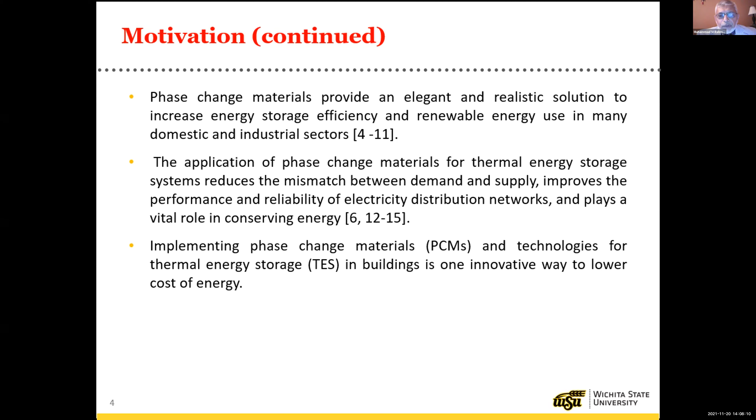Implementing phase change materials and storage in general, we can see there are two routes: one is the thermal route and one is the chemical route. We have worked on both of these routes, and I have a review paper on the chemical route as well, but today we're going to talk primarily about thermal things.

So in the thermal route, we store energy by sensible heating as well as by latent heating. Looking at latent heating first, we can conceptually have solid-liquid phase change, liquid-gas phase change, and solid-solid phase change. But in building applications, of course, the solid-liquid is the only feasible one.

So this is the only one which really is possible in building applications. And even for power applications, the gas phase picks up a lot of volume and becomes a difficult system to design and so on.

In sensible heating, as the temperature increases, it will store energy, and it will happen both in the solid phase and the liquid phase. So practically, we see that you can build a good phase change energy storage system by using the solid-liquid conversion, and then having some storage in the sensible mode, both in the liquid as well as in the solid portion.

So if we look at the equation for how much energy we're going to store, we can do a very simple equation like this: we store energy from initial temperature to melting temperature, then we store isothermally, or approximately isothermally, when the material changes phase from solid to liquid, and then we store more as we go from the melting temperature to the final temperature. This is for the charging phase of the system, and the discharging is just the reverse.

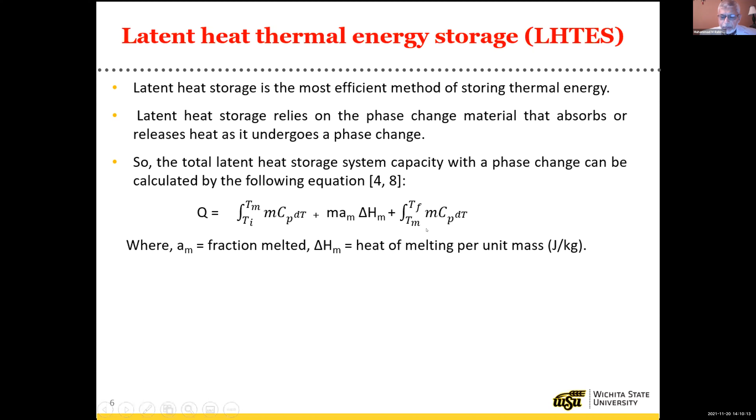Looking at the desirable properties of the phase change material, there are thermal properties which are important: the melting temperature in the functioning range, where we want to maintain the temperature, and of course we like to have a high latent heat. The specific heat also adds up, because we'll have some sensible heating in both phases, so a higher specific heat is better for us.

High thermal conductivity is extremely important because that is going to determine the rate of heat transfer during the charging and discharging of energy from our energy storage module.

Some physical properties are also important: a small volume change on phase transformation, favorable phase equilibrium, congruent melting of the phase change material, and the density should be high so that we can build a system with a reasonable amount of mass.

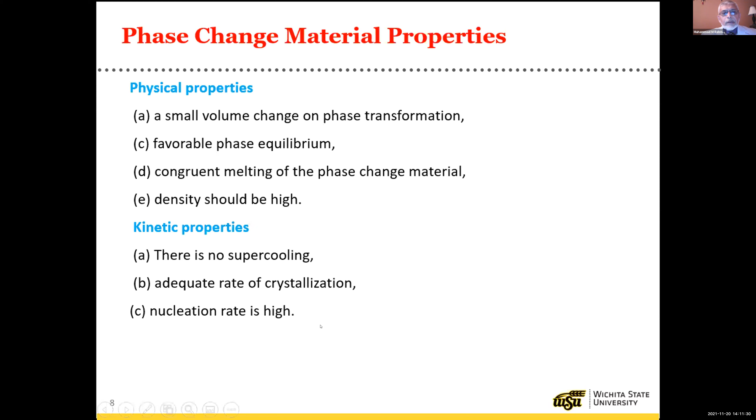There are also a few kinetic properties: there should be no supercooling, an adequate rate of crystallization, and a high nucleation rate. So those are the desirable kinetic properties.

A whole bunch of chemical properties is needed. The PCM should have an entirely reversible freezing-melting cycle, long-term chemical stability, compatibility with the containment material, and be non-toxic, non-flammable, and non-explosive to provide safety of the system. The phase change material should also be readily available in large quantities and at low cost.

All these different ideal things do not hold in real life, so we're always striving to make the system work by doing fine tuning.

One of the fine-tuning approaches we use is incorporating nanomaterials along with the phase change material to change the properties. We have done work with both solid-liquid melting as well as in high temperature systems, where we use the nanomaterials to enhance radiation. But that, of course, increases the cost of the system.

If we look at phase change materials, a good number of materials used, particularly for low temperature applications, are in the organic group. A lot of paraffin compounds have been used, and some non-paraffin compounds as well. That's the organic group, and then in the inorganic group we have salt hydrates as well as metallics. Both are very popular, and we can make eutectics by combining organic with organic, or organic with inorganic.

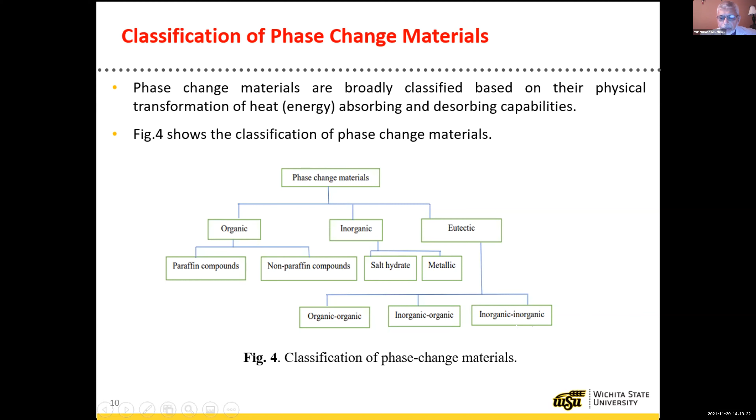If we look at the advantages and challenges we face in each of these groups, in the organic group we see that they're available in an extensive temperature range. Latent heat of fusion is fairly high, no supercooling, usually chemical and thermally stable, and they are also recyclable, which is very important in life cycle design. Good compatibility with other materials, usually non-reactive and safe. But it has some challenges, particularly low thermal conductivity, relatively large volume change, low phase change enthalpy, and some of them happen to be flammable.

By making eutectics, we can get a wide range of phase change temperatures. That's the most usual application of eutectics. They do provide high heat capacity, little supercooling, good chemical and thermal stability, but the low thermal conductivity is the problem.

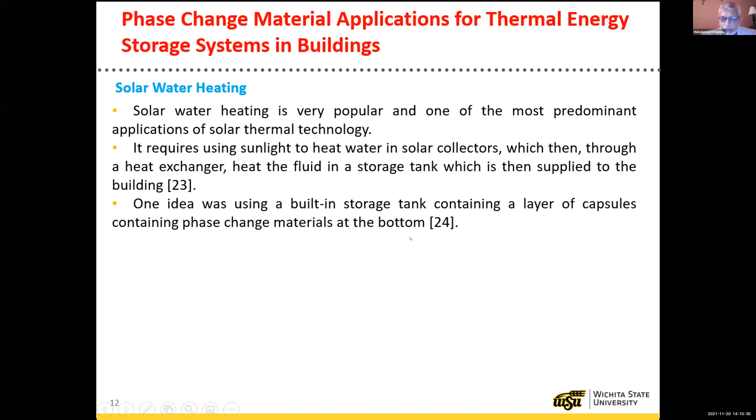Now let's talk about some of the traditional applications of phase change material in the building sector. One of the things people have used for a fairly long time is solar water heating. Solar water heating is a very simple system we can build, essentially by acquiring the energy from the sun and storing it. Typical designs use a built-in storage tank containing a layer of capsules with phase change material at the bottom of the tank or on the side of the tank, storing the energy gathered from the sun.

Another sector is space heating and cooling. Phase change material can be applied to both active and passive heating and cooling systems. In the passive system, we typically encapsulate the material into the building structure such as ceiling, floor, concrete, gypsum wallboard. In the active system, we capture the energy from the sun and then try to use some of the energy for the generation of electricity if we can gather enough from the sun.

Waste heat recovery is another application. It's a very simple application, but typically these are not residential applications with great amounts of heat. It's in the industrial sector where we possibly have a lot of heat. But that's another application we can think of.

Let's talk about the limitations of phase change material. One of the limitations we come across is supercooling. Supercooling happens when the liquid solidifies below its usual freezing point and thus experiences a delay in starting the solidification process. So we store the energy, but we have difficulty in extracting the energy back from the system.

The group which suffers more from this issue is salt hydrates, which supercool before the freezing point during extraction of the stored energy after prolonged use. This causes a decrease in performance and will eventually lead to slower heat recovery from the phase change material. It's more common in inorganic phase change materials to suffer from this limitation. Also, when we do encapsulation, we have a lack of nucleation space in small spaces, so that's another issue we need to solve.

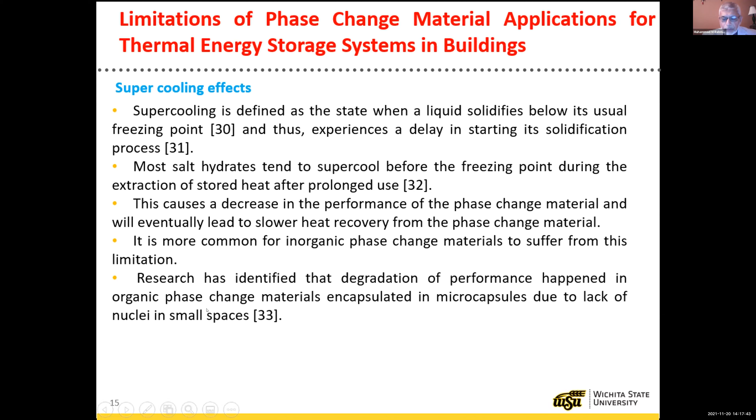The low thermal conductivity is a major problem, but there's been a lot of work done to address it. Phase change material generally possesses very low thermal conductivity, which results in a lower heat transfer rate in and out of the latent thermal energy storage application. In the residential sector, low thermal conductivity could severely affect the performance of the phase change material system. With lower thermal conductivity, the occupant comfort level provided by the phase change material is not realized at full capacity.

Phase segregation is another issue in using phase change material. It's one of the most significant adverse influences on the cyclic thermal stability of the material. It's most usual in multi-component phase change materials where the density of components is dissimilar, leading to eventual separation of the components due to gravity, which changes the melting point of the phase change material. Incongruent melting, when a solid substance does not melt uniformly, particularly in salt hydrate-based phase change materials, is another main cause of phase segregation. Phase segregation restricts the long-term stability of the PCM, so we like to avoid that as best as we can.

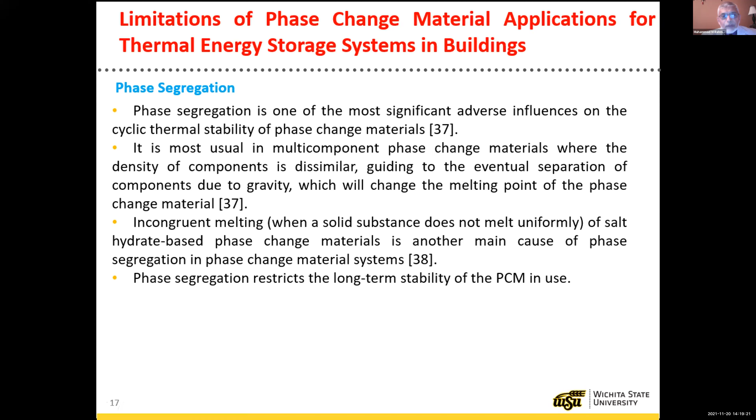In residential application, fire safety is extremely important. Some very common building materials like gypsum plasterboard have been used quite heavily in the residential sector and tend to be quite safe. But when we use 24% paraffin-based phase change material, the fire hazard increases tremendously. So we have to be careful in applying the phase change material and make sure that the fire hazard does not happen.

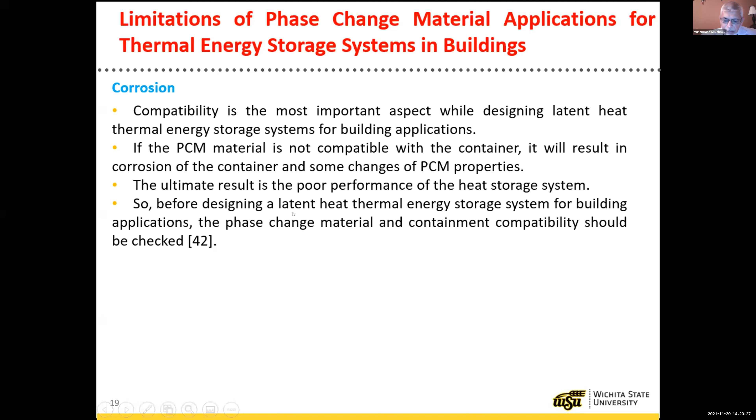Corrosion is another thing you have to be careful of in essentially any engineering design. Compatibility is the most important factor. If the PCM material is not compatible with the container, it will result in corrosion of the container and some changes in the PCM properties. The ultimate result is poor performance of the heat storage system, including leaking. So we need to be mindful of that.

And cost is again the ultimate thing we have to look at. Particularly if we change the phase change properties and use nanomaterials, we have to be careful about that, so the cost does not increase tremendously.

Another interesting thing we found is that the general public is not that much aware of phase change material, and we, as engineers, need to talk to the public and highlight the benefits of phase change material to make it more acceptable to technical as well as non-technical audiences.

We looked into a case study to see how much energy saving we can do. This was a fairly straightforward exercise, I would say.

We compared the energy use without the PCM as well as using two PCMs, to see how much energy we can save. The software we used was the Energy Plus software, which is available from the Department of Energy for public applications.

It's a very simple software, but it has been quite well validated and verified by different authors, particularly with the ASHRAE Standard 140, which was the important validation exercise that's been done.

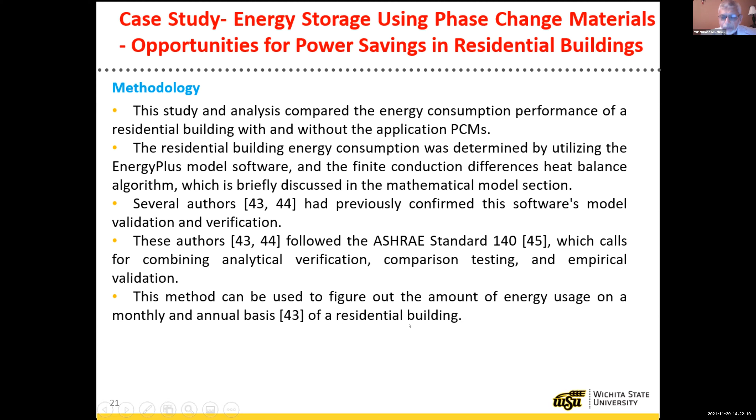So in the cooling load, we did it without the PCM and then looked at what happened with the PCM, and compared that for the whole year. Maybe we can just look at this table: without PCM, that much is the kilowatt hour requirement for the building which we used.

With the PCM, we got it lower by 2.13%. With the DuPont, we lowered it by 4.34%. The cooling load was 105,049 kilowatt hours - we got 3.74% saving with the PCM, 2.02% saving with the DuPont. And overall for the whole year, we get right around 3% saving using the PCM.

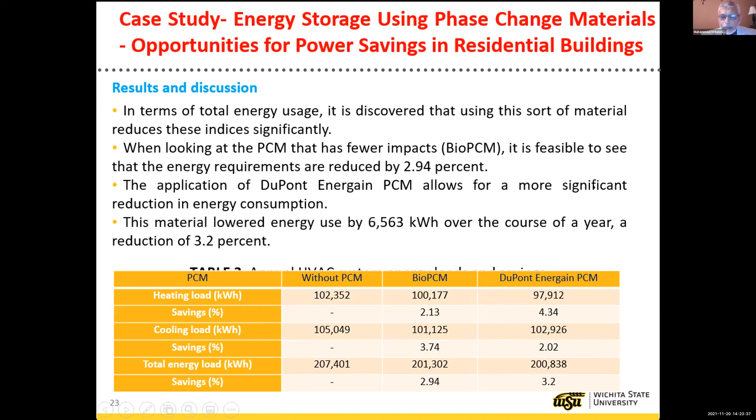So if we do use PCM, we do get some savings, as long as we can justify the cost of using the PCM.

So the use of PCM to reduce the consumption of residential buildings has been discussed. Two distinct PCMs with melting points of 21.6 degrees and 29 degrees were investigated in the study. The study was conducted using dynamic simulation software of a DOE mid-rise apartment building, examining energy performance as well as weather data, with and without the use of PCM material.

It can be deduced from the numerical analysis that the application of PCM in external walls and roofs stores heat energy from solar radiation, hence reducing the energy consumption for heating and cooling. The study resulted in a maximum decrease of 4.34% in heating energy requirements, a reduction of 3.7% for cooling requirements, and a maximum reduction of 3.2% overall throughout the year.

So I'm leaving 5 minutes for questions so that we can have a good discussion by getting input from the audience.

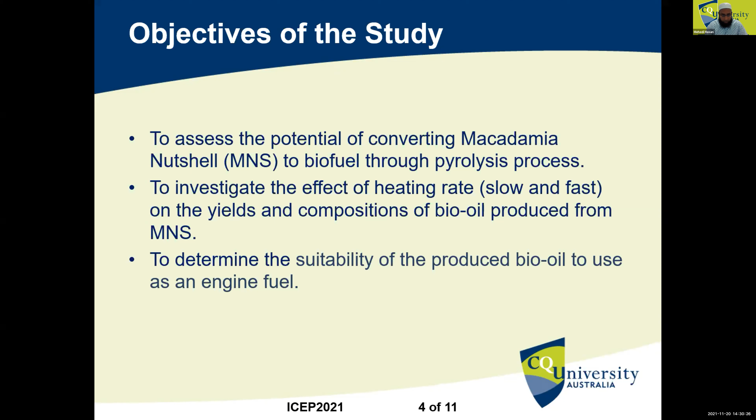Therefore, this study aims to assess the potential of converting macadamia nutshell to energy products, especially bio-oil, using the pyrolysis process, and to evaluate the effect of heating rate, slower and faster, on the quality and quantity of the produced bio-oil from macadamia nutshell, and finally to determine the suitability of the produced bio-oil for engine fuel using the pyrolysis process.

Here you can see the macadamia nuts covered with shells. After processing these macadamia nuts in the industry, these shells are generated. So we collected the shell, and then it was sun dried for 12 days. After that, the desired size was prepared with the help of a shredder, which is 2 millimeter size. Then these shredded shells are fed into the reactor, an auger reactor.

This reactor has the facility of conducting both slow and fast pyrolysis. In case of fast pyrolysis, the macadamia nutshell is fed into this hopper, and then nitrogen gas is purged to make the system inert. After that, from the control panel, the temperature heating is started and the temperature is set. When the temperature reaches the desired temperature, which is 500 degrees Celsius for this study, the auger motor is started, which carries the macadamia nutshell through the auger.

During this travel, the pyrolysis process takes place. After completing the travel, the macadamia nutshell is converted into biochar and is dropped into the biochar vessel. It also produces gas during the pyrolysis process, which has condensable and non-condensable components. This gas is passed through a condenser, which condenses the condensable gases into bio-oil, and the non-condensable gases, called syngas, leave the system through this exit valve.

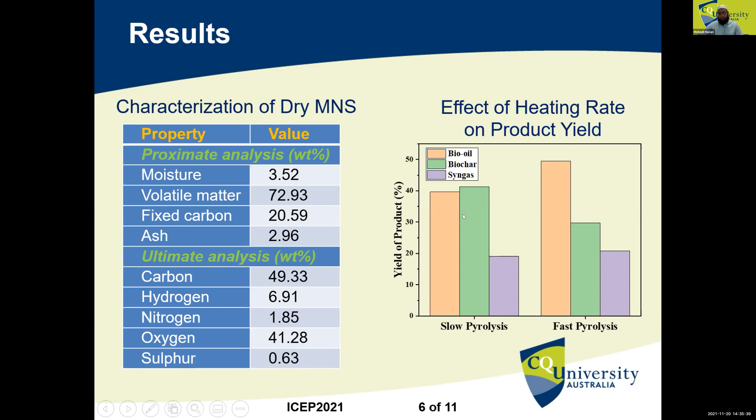However, the bio oil has some acidic compound, which is not good for use as engine fuel, because acidity will create aging problems in the bio oil. So it will limit its application as an engine fuel. The suitability of the bio oil to use as engine fuel or commercial fuel can be clearly understood from its physiochemical properties.

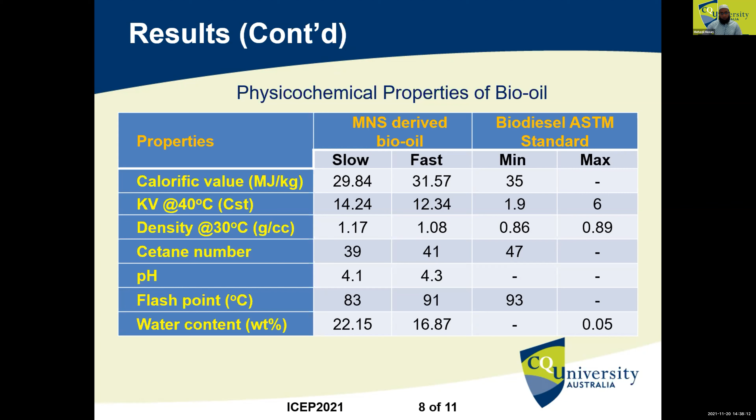We can see that the calorific value, when compared with the biodiesel ASTM standard, is clearly not close to the biodiesel standard range. So this is not suitable for engine application, and kinematic viscosity and water content are very high. From these results, we can say that if we want to use it as engine fuel, it needs proper upgradation using various upgradation processes.

From this, we can conclude that the macadamia nut shell bio oil has a lower moisture content and a higher carbon percentage, making it a suitable feedstock for the pyrolysis process. A higher amount of bio oil was obtained, around 49.7% in fast pyrolysis. The bio oil contains major chemical compounds like benzene, toluene, phenol, styrene, and acetic acid. However, due to higher viscosity and water content, bio oil's application as engine fuel is not possible at this stage. Proper upgradation is required.

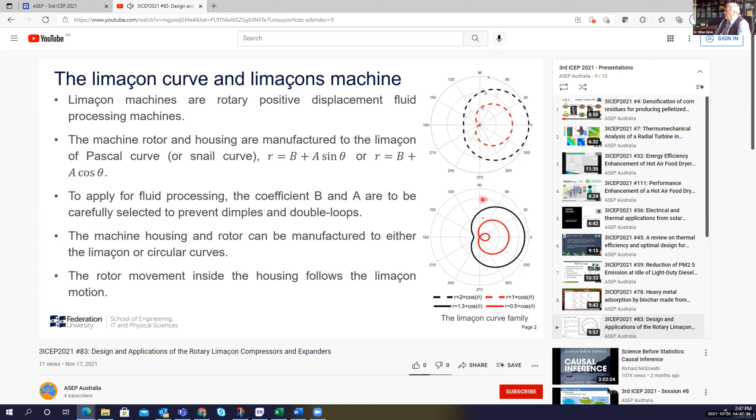If we move to the second figure, the red curve here, you can see we have a double loop. For limaçon machine applications, we want to use the black dotted curve on the first figure. This curve will provide dimple free and single loop motion. The reason behind using a single loop, dimple free curve is that it ensures a smooth motion and transition of the machine rotor inside the housing.

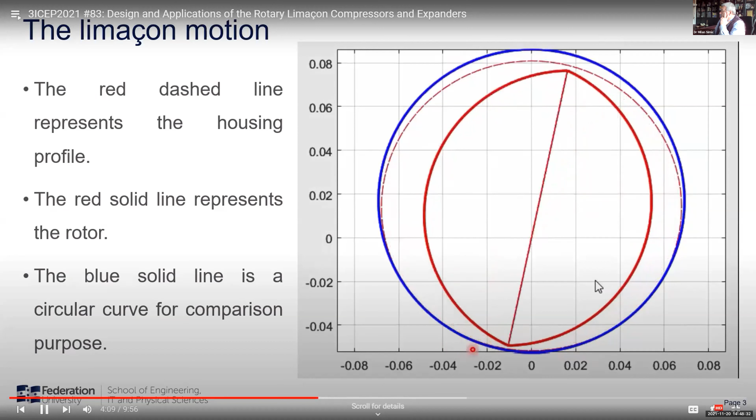On the next slide, we'll see the animation of the motion of the rotor inside the housing. Here, as you can see, the red dashed line represents the housing profile. The red solid line rotating there represents the rotor, and the blue line on the outside is a circular curve, which I plotted here for comparison purposes.

So this is a limaçon motion. As you can see, the straight line, we call the rotor chord, and that rotor chord rotates and slides about the pole O. This point is the pole O.

Currently we have three limaçon machine embodiments. There are three of them: the limaçon to limaçon machine, the circle limaçon machine, and the limaçon to circular machine. The distinct differences between these designs are the rotor and housing profiles. Going from left to right, the left one is the limaçon to limaçon machine, where the housing is a limaçon curve, and half of the rotor is a limaçon curve, mirrored about the rotor chord, creating a lenticular shape for the rotor.

Moving along, the next one is the circolimaçon machine. With this machine, the housing and the rotor are both made of circular curves. However, the motion of the rotor inside the housing follows the limaçon curves. The downside of this is the gap between the rotor apex and the housing changes as the rotor rotates inside the housing. This creates trouble for sealing, because the seal has to travel a large distance to cover that gap.

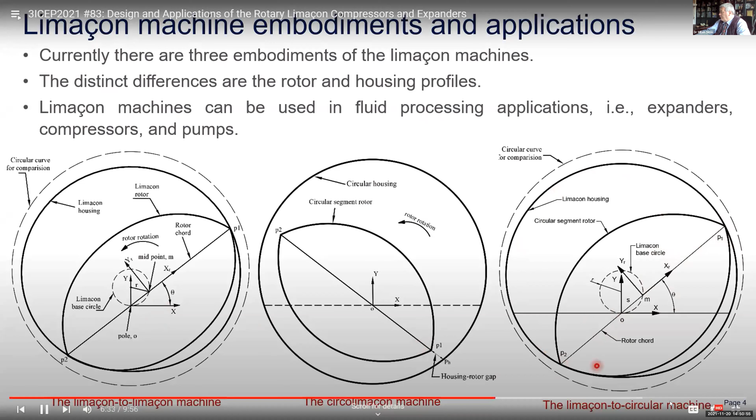To address that issue, there's a third embodiment we call the limaçon to circular machine. The housing of this machine is a limaçon curve, while the rotor is comprised of two circular sections that are mirror images of each other about the rotor chord. This embodiment has the advantages of both designs, using the limaçon curve, but also the advantage of manufacturing the rotor easily, since you just need to follow a circular curve here.

With the limaçon to circular machine and the limaçon to limaçon machine, you don't have the problem where the gap between the rotor and the housing keeps changing. So it's constant throughout the rotation.

On this slide, we'll talk about the work on limaçon machines. Work on different machine embodiments has been carried out over the years to investigate the use of both limaçon and circular curves for the rotor and housing profile, while maintaining the limaçon motion of the rotor inside the housing.

Other work shows the rotor and housing share the same rotor chord. In fact, in the case of the limaçon to limaçon machine, the lower half of the rotor profile is the same as the housing. Therefore, to prevent rotor-housing interference while minimizing the rotor-housing gap, an interference prevention scheme has been developed, as shown in the work by Sultan.

With the design and interference scheme in place, it's now important to optimize the geometry of the machine to suit the working conditions set out by particular applications, like machine inlet and outlet pressure, the type of working fluid, the machine working speed, and so on. On top of that, high volumetric and isentropic efficiency are to be maintained. For optimization methods, we can use SPSA, simultaneous perturbation stochastic approximation, or Bayesian optimization.

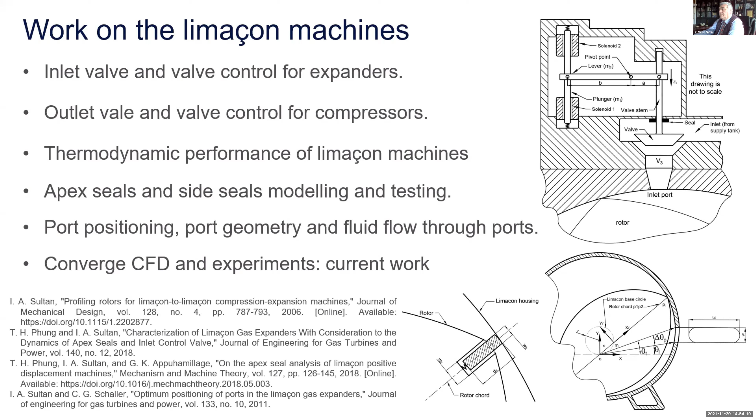That concludes this presentation, and thank you for your attention. If you have any questions, please feel free to ask, and I'm happy to answer.

Okay, hi everyone. Because the presenter is not here, I suggest— Oh, I'm here, it's me, just a second. Oh, sorry, you didn't want to— No, it's okay, that's okay. Then we have questions for you. Are there any questions?

Okay, I have one question. Your work is very interesting. I didn't do research in this field, so please share how you set up the experiment for your study of thermodynamic performance.

So, is that all of the question? How to set up the experiment? How to set up, yeah, I get it. Is that all? Yeah, for the test.

So what we've been doing: we developed the mathematical model, optimized the design, and ran the CFD simulation. The next stage will be to use the outcome of the mathematical design and CFD simulation, which gives us the dimensions. We'll create a prototype and put it in a system to test. We have inlet and outlet, and sensors to measure the temperature, the pressure, the torque, and the speed of the crank, and we'll compare these to the mathematical model and CFD simulation to make sure the design is sound and achieves higher performance. So that's the plan for the next phase.

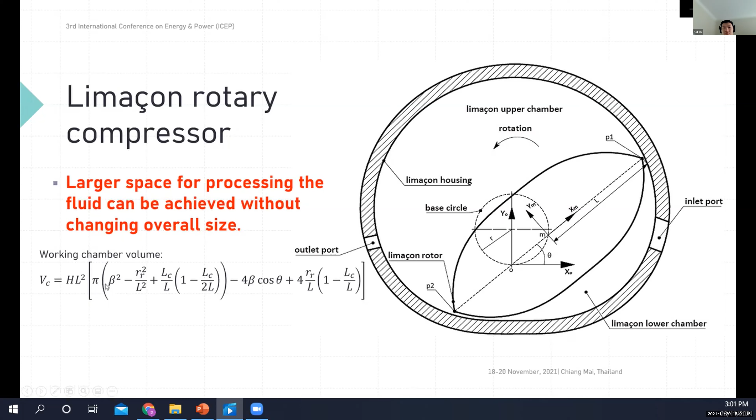The purpose of this study is to use Bayesian optimization to optimize the geometric parameters of the limaçon compressor to meet some specific volumetric and geometric design requirements, which are reflected by these three parameters.

The first one is the rotor housing clearance, which is the distance between a random point on the profile of the rotor to the machine housing, as indicated in this figure. The reason we have this clearance is because, as mentioned previously, the profile of the rotor and housing are based on the same limaçon curve, and it is unavoidable that interference issues between these two components occur during operation, which might significantly affect the machine performance. So to prevent that, the rotor housing clearance must be ensured to be big enough so that these two components will not interfere with each other during operation.

The next one is the volumetric ratio, which is defined as the ratio of the minimum chamber volume to the maximum chamber volume. Generally, with the clearance satisfied, the minimum volume, as indicated in this figure, should be kept as small as practical so that the volumetric performance and machine capacity would not be significantly affected. Hence, this ratio is to indicate whether the limaçon compressor can present a satisfactory volumetric performance or not.

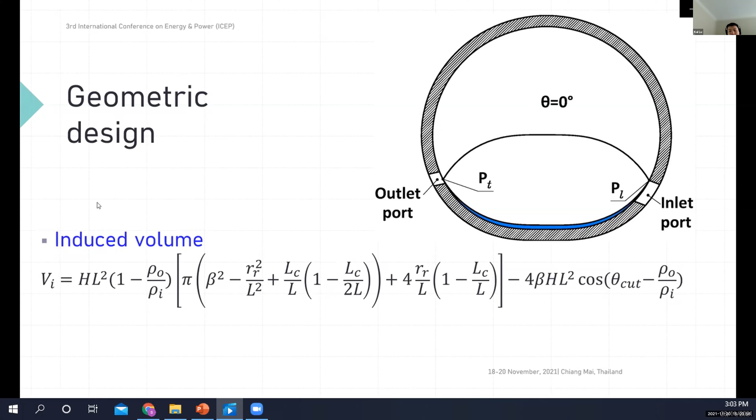The third one is the induced volume, which is the volume of the working fluid that flows into the chamber during the suction stroke. This induced volume measures the effect of the residual fluid on the fresh charge during the suction stroke. The purpose here is to make sure these three parameters, the rotor housing clearance, the volumetric ratio, and the induced volume, satisfy some predefined design requirements.

To do that, we apply Bayesian optimization. The reason is that generally the optimization of compressors is regarded as a black box problem in which the mathematical expression relating inputs and outputs is quite complex and sometimes impractical to obtain. So for this type of problem, the Bayesian optimization method has been proven to be very efficient and accurate.

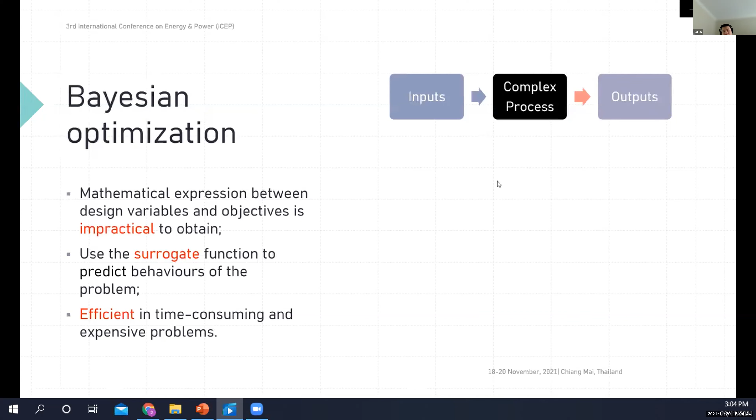It starts with sampling the starting data to build a prior distribution using the Gaussian process. From this prior distribution, the Bayesian optimization develops a surrogate model to describe the optimization problem. After that, some new data points are sampled from the searching domain, and the Bayesian optimization employs the acquisition function to evaluate whether the candidate point is suitable for the next evaluation.

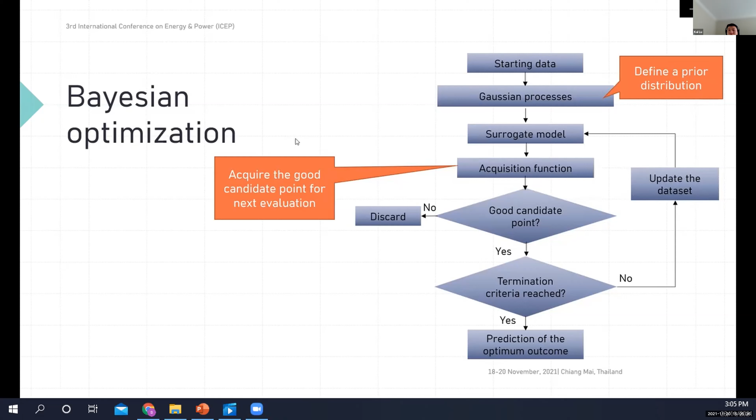This is the flowchart to illustrate this optimization procedure. As can be seen, we firstly generated 10 sets of data and obtained the corresponding objective functions using the geometric model presented previously. We then feed this data to the Gaussian process to build a surrogate model. After that, we sample some new data points from the searching domain and use the acquisition function to determine the next point.

For this optimization, it is relatively impractical to find the exact set of desired variables that produce the global optimum. Also, there might exist multiple settings of the desired variables that yield the same result due to the nonlinear relationship. So for the terminating condition, it is more feasible if the global optimum is reflected by a number of results obtained from the optimization. We decided that the terminating condition is when we obtain 90 sets of results from the optimization.

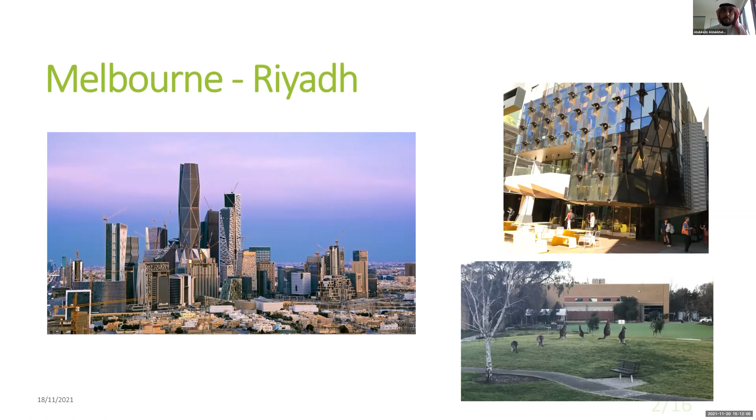Before I start, I would like to introduce the two beautiful cities: Melbourne in Australia, where I'm doing my PhD in mechanical and manufacturing engineering at RMIT University, as you can see on the right side, with some kangaroos on the campus. On the left hand is my hometown, Riyadh, the city in Saudi Arabia.

Moving to the outline, today we're going to introduce the project objectives and the role of artificial intelligence, also the role of artificial intelligence in traffic system modeling, a comprehensive system for traffic data collection, analysis and data management, the role of social media in intelligent transport systems, and finally the public opinion on autonomous vehicles.

Moving to the introduction, there are two main goals of this project: to report improved transport safety and efficiency, the development of new computer vision algorithms, artificial intelligence applications, Internet of Things, cloud computing, and investigating and raising public awareness of the transition in the transport sector.

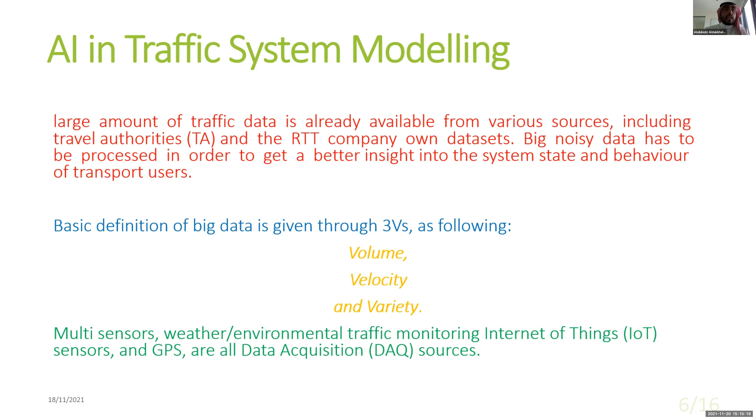Multi-sensors, weather, environment, traffic monitoring, Internet of Things sensors, and GPS are all data acquisition sources.

Comprehensive system for traffic data collection, analysis, and management: our main objective is to develop an ITS prototype to observe and control road traffic in real time based on computer vision and other sensory data fusion. This has not been done comprehensively, although current data acquisition systems, hardware, and communication resources can support that approach. Moving to the high-level concept of RTT.

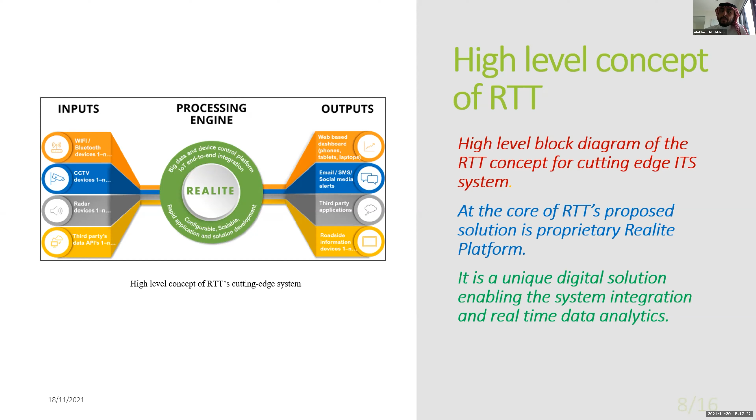When we talk about the public transport system, drivers and pedestrians, all of us, the general public, are key users and stakeholders in the transport system. We conduct research into public behaviors in transport and public opinion about changes and the roadmap to future mobility.

Social media's role in intelligent transport systems: nearly two-thirds of the Australian population own smartphones and use social media. Australia's smartphone ownership rate is higher than most other developed nations, so it's important to leverage cutting-edge technologies towards managing the transport system.

We present results from our public opinion survey on autonomous vehicles, in parallel with research in autonomous vehicle engineering and technology, including the development of new algorithms for path planning. We conduct investigation into public readiness to accept the new technology. This is a large project involving Australia, Saudi Arabia, and the global community.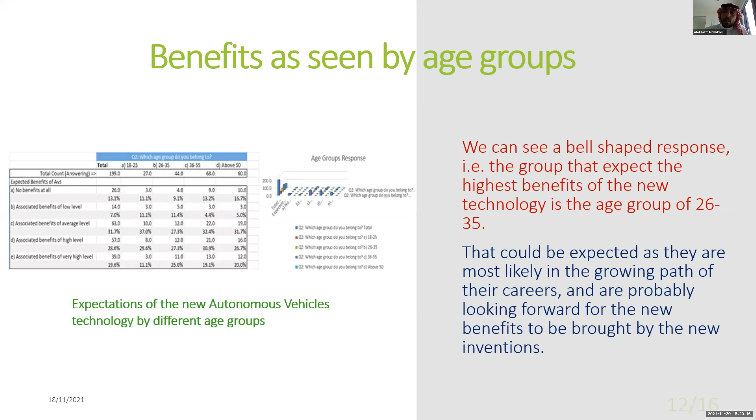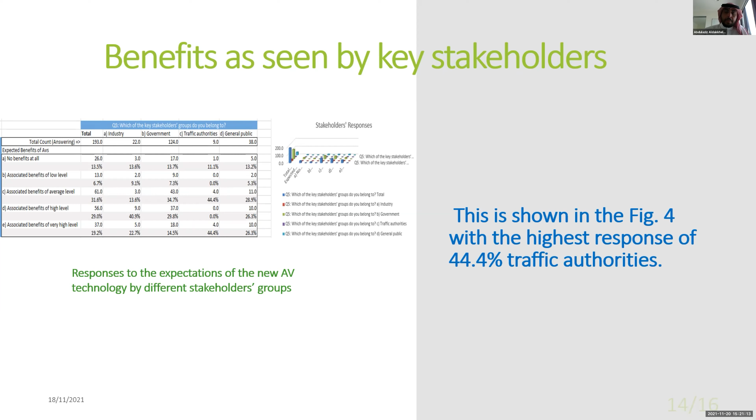Here are the benefits by key stakeholders: industries, government, traffic authorities, and the general public. As shown in the table, the highest response was from traffic authorities at 44.4%, indicating the need for autonomous vehicles to exist.

To sum up, we have presented here our research into intelligent transport systems, ITS development, and new technology introduction to the public.

Moving to the mobility of the future, this includes state-of-the-art ICT technologies starting with artificial intelligence, big data collected through the Internet of Things, computer vision, social media, and other sources. Cloud and edge computing are responsible for data processing in real time.

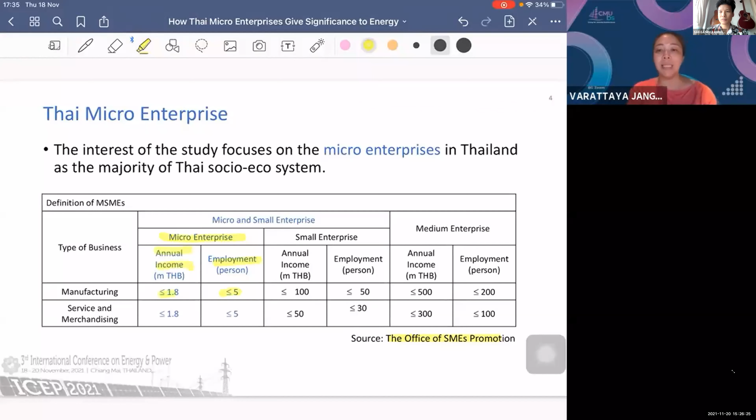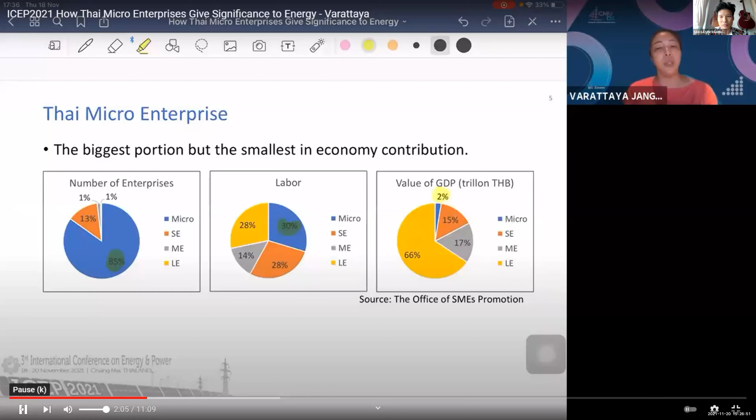So why is micro enterprise very important? Now we will focus on the definition of micro enterprise. The source is from the Office of SME Promotion: micro enterprise includes manufacturing, service, and merchandising. Employment must be less than 5 persons, and annual income must be less than 1.8 million baht. Micro enterprises make up 85% of the enterprises in Thailand, and those 85% hire only 30% of the labor. Looking at the value of GDP from micro enterprises, they give only 2% of the GDP in Thailand.

Thailand, like the rest of the world, is facing energy and environmental scarcity. We use about 2.07 million barrels of oil per day, but can produce only the equivalent of 0.88. So in 2021, we are actually targeting...

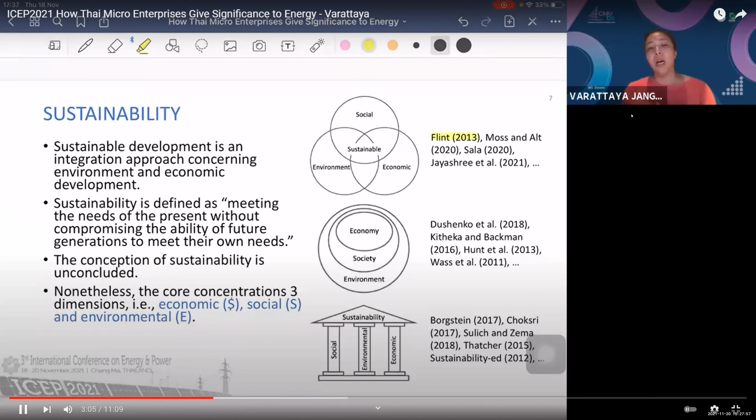Another way is sustainability. There is a lot of work here. The first one, Flint 2013, is like a triple bottom line where social, environment, and economics are put together. The second one, Dushenko, we call NEST, where sustainability is included in everything. The third one, Borgstein, we call 3 Pillar, where social, environment, and economy help their sustainability. Nonetheless, the core concentrations of sustainability have 3 dimensions: the first is economic, the second is social, and the third is environmental.

So we're moving to the SDG, the Sustainable Development Goals established by the UN. We have 17 categories, 17 approaches, and those 17 approaches have about 232 indicators where data is available. Actually the KPIs are more than 232, but at the moment, based on available data, we can track only 232 SDG indicators. This SDG combines with social enterprises in every model, so we can see that SDG and sustainability are all aligning together.

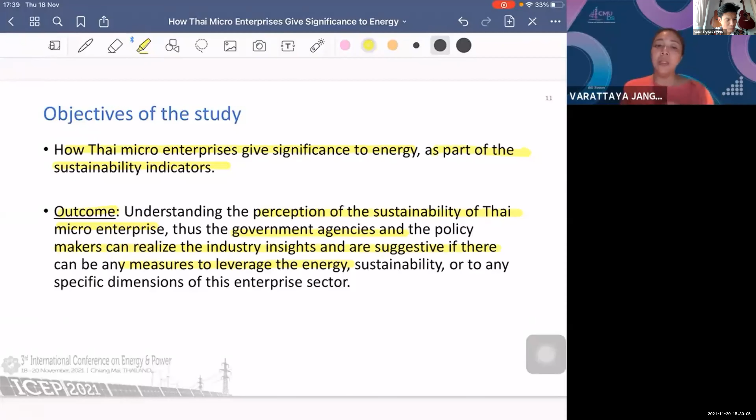So the objective of this study is how Thai micro enterprises give significance to energy as part of the sustainability indicators. The outcome, we want to know the perception of sustainability of Thai micro enterprises, so that government agencies and policymakers can gain industry insights and suggest measures to leverage energy, sustainability, or any specific dimensions of this enterprise sector.

The methodology has 3 steps. We investigate 2 perspectives of the result. First, we develop the questionnaire; second, we do the data collection; third, we do justification of data and analytics. For the results, we have 2 things: first, we investigate the average score of the significance level of the sustainability indicators; second, we try to find the correlation of the sustainability sub-dimensions.

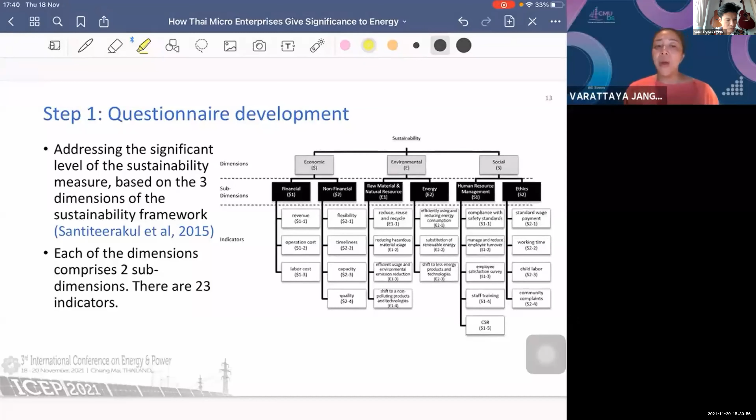So step 1, we actually use the Santiteerakul framework to develop the questionnaire, and each dimension comprises 2 sub-dimensions, with a total of 23 indicators.

If we look a little closer into the indicator, we can see that energy included in environmental has efficiency using reducing energy consumption, substitution of renewable energy, and shift to less energy products and technologies. So that's the second one, we do the data collection.

We distributed questionnaires to 100 micro enterprises in the northern Thailand industry supply chain, and 49 questionnaires were returned. The survey was conducted during the period of January to April 2021. A scale of 1 to 5 was used, where 1 indicates least important or least concerned, and 5 indicates most significant or most concerned. This is an example of the questionnaire.

So we come to step 3, the data justification and analysis. As you can see, for respondent number 2 and number 5, the averages are different. Number 2's average is 3.5, so if they answer 2.2 to 4, that means it's very good for them. But for number 5, the average is, for example, 4.5, so if they answer 2.2 to 4, that means this indicator is very bad for them.

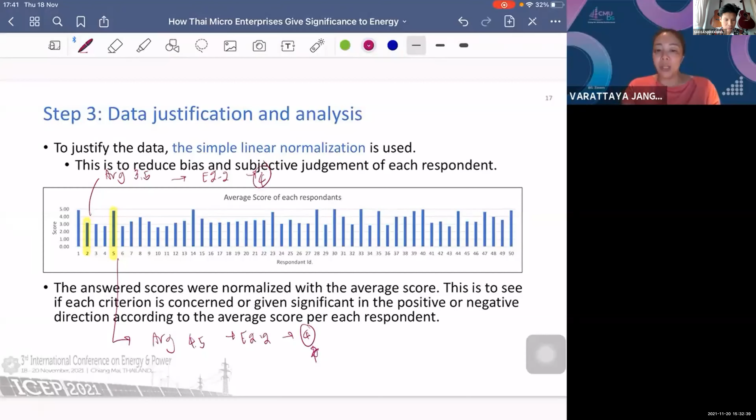As you can see, so to reduce bias and subjective judgment for each respondent, we use simple linear normalization. After that, in the results and discussion, the first result is when we investigate the average score, number 0 is the average score. We can see that some parts are positive and some parts are negative, and you can see the big part of energy, those 3 things are negatively concerned for the micro enterprises.

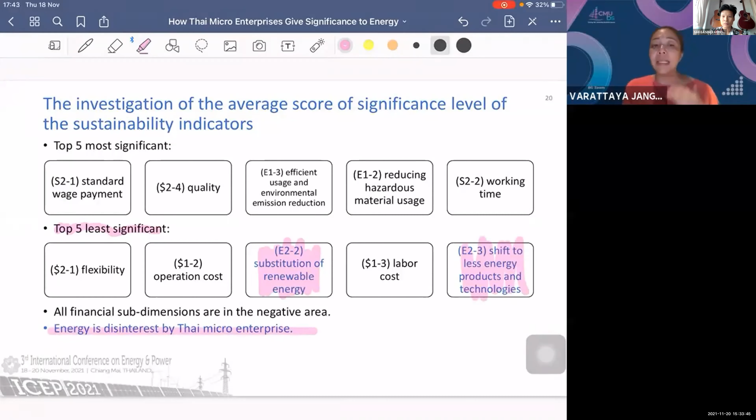The investigation shows that the 5 most significant indicators are standard wage payment, quality, efficient usage, environmental emission reduction, reduction of hazardous materials, and working time. But the top 5 least significant are flexibility, operation cost, substitution of renewable energy, labor costs, and shift to less energy products and technologies. So we can say that energy is very disinterested by Thai micro enterprises.

And then if we use a triangular distribution by the @RISK software, it shows that energy is the most minus on the mean, which means that it is very bad for the micro enterprise.

If we look into the correlation of the sustainability sub-dimensions, we can say there's a positive correlation between energy, raw material, and natural resource. We also have a positive correlation between energy and human resource management, and an indirect correlation between energy, financial and non-financial, and ethics. So if we put in more financial, then the concern for energy becomes less.

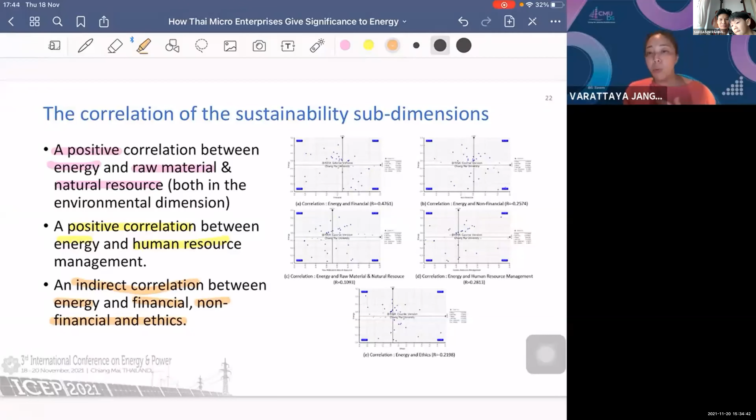So in conclusion, this paper aims to report the perception of sustainability of Thai micro enterprises according to the survey, how they give significance to each of these sustainability indicators. The results show that energy is one of the least concerning areas for Thai micro enterprises. Substitution of renewable energy and shift to less energy products and technology are among the least significant topics out of the 23 sustainability indicators. That's why energy also has a direct correlation with raw material, natural resource, and human resource management.

Nevertheless, in this paper the analysis is statistically inconclusive as the sample is very small, but yet the result may be suggestive if policymakers wish to leverage sustainability in any specific dimension of these sectors. Thank you very much.

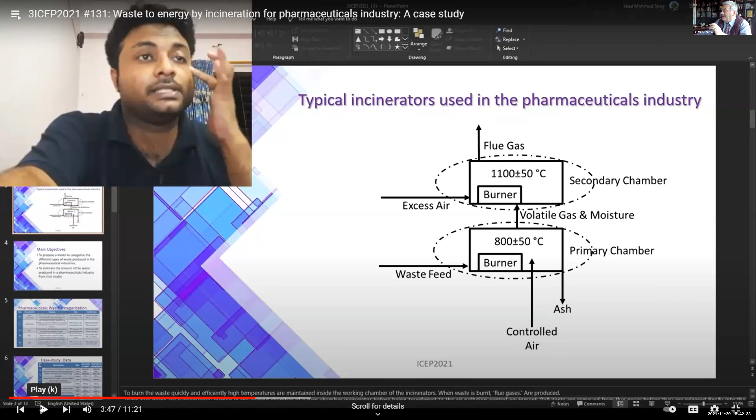Yes, play from this place. I will play from there. Gas temperature making it safe. Sorry for any problems, it is all on YouTube. Please, we continue where we were listening, but it's only a couple of slides, just the first slide now, so you didn't miss too much. Keep going: we let it out in the atmosphere.

Let's go to our next slide. Here we are discussing our main objectives. Our main objective is to propose a model to categorize the different types of waste produced in the pharmaceutical industries and to estimate the amount of waste produced in the pharmaceutical industry from that model.

Here we have categorized the waste that we may be having in the pharmaceuticals industry. The categorization is based on their type, their characteristics, and we have given some examples. We have also discussed their state, and their calorific value is given in this column. Next, we'll go to our next slide.

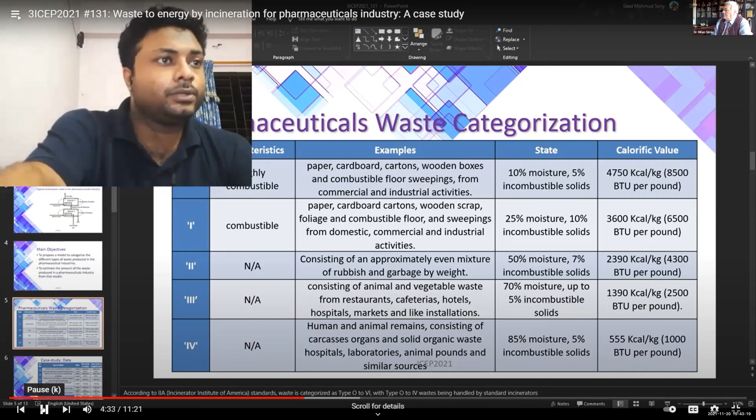This is our case study, and we have further talked about the waste. This categorization is based on the waste coming out of different manufacturing processes and activities from the pharmaceutical industry. Here we have talked about the state of the waste, and this column represents the weight of the waste.

Our next slide is about the calorific value. We have provided the calorific value of solid medical waste here, liquid medical waste here, and this is the calorific value of diesel fuel. This column represents the value of all this waste type and the diesel fuel, and this is the ratio of the mixture.

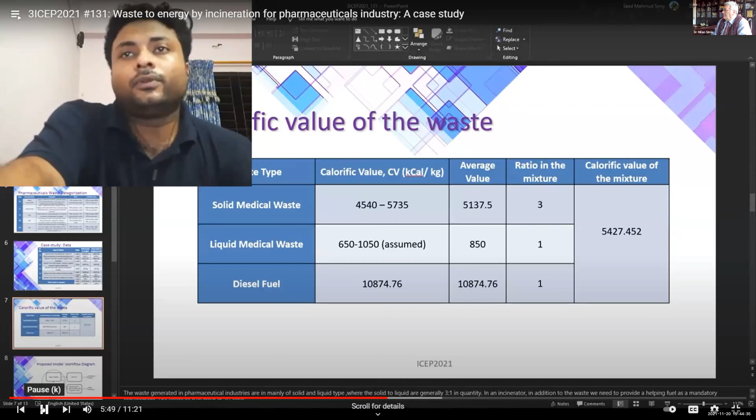We have done a calculation to find out the calorific value of the mixture, and it was found to be 5,427.452 kcal/kg. Our next slide talks about the workflow of our proposed model.

From here we are feeding the waste in the bottom chamber. This is the representation of the dual chamber incinerator. This is the upper chamber. The flue gas will be coming out from the upper chamber, and this is the incinerator exhaust. The thermal energy from these two chambers will be utilized to generate the steam here.

We will be going to our next slide. This is about our schematic representation of our proposed model. Here we have provided the schematics that we will be using to convert our waste, the thermal energy from our waste, to generate the steam.

Here we are feeding the waste. Here the control air will be entering into the primary chamber. From here we will be burning the waste from this burner. The temperature of the primary chamber will stay within 750 degrees centigrade to 850 degrees centigrade. This configuration represents the water tube configuration.

This configuration will be utilized to generate the steam, and from here the volatile gas and mixed moisture will be going to the secondary chamber. The secondary chamber also has some tube-like structure like the primary chamber is having. This will also be utilized to generate steam, and finally the flue gas will be discharged to the environment from this chimney type structure.

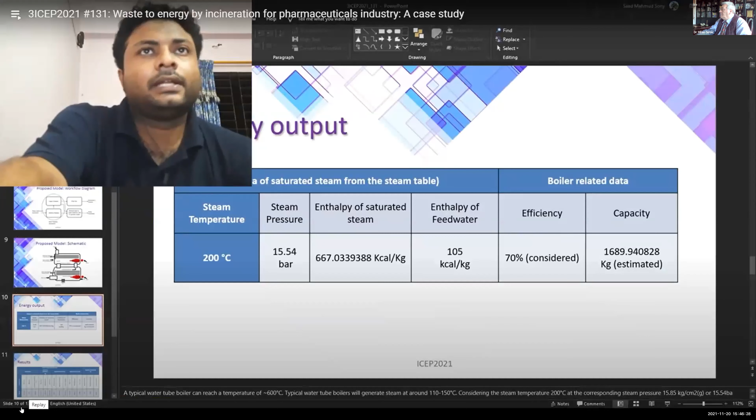Now we'll be going to our next slide. Our next slide is the representation of the energy output that we'll be getting when we are incinerating the waste. Here we have utilized the data from the steam table to have the exact steam pressure at the adjacent temperature, and this is the enthalpy of the saturated steam.

This is the enthalpy of feed water, and we have considered the efficiency to be 70%. When we utilize all this data, we are getting the capacity of our boiler that will be generating the steam while the incineration process is carried out. The capacity was found to be 1689.94 kg approximately.

This slide is actually a brief summary of the results that we found after doing all this calculation. Here we have represented the steam related data. These are the parameters: this represents the temperature, this is the pressure representation. We have considered the efficiency as 70%, and the generation capacity was found at 1689.9.

This was the capacity per watt. This column represents the fuel saved. This is the representation of daily savings in kilograms. This is the monthly saving in kilograms. This is the yearly saving in kilograms. This is the carbon dioxide reduction in kilograms.

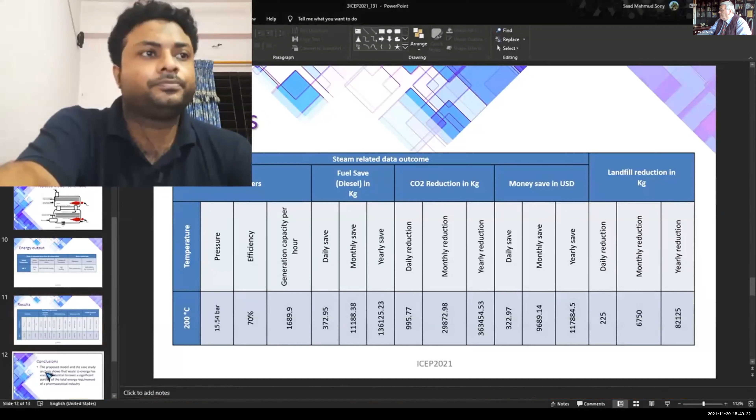So in conclusion, I would like to say that the proposed model and the case study analysis shows that waste to energy has enough potential to cover a significant portion of the total energy requirement of a pharmaceuticals industry.

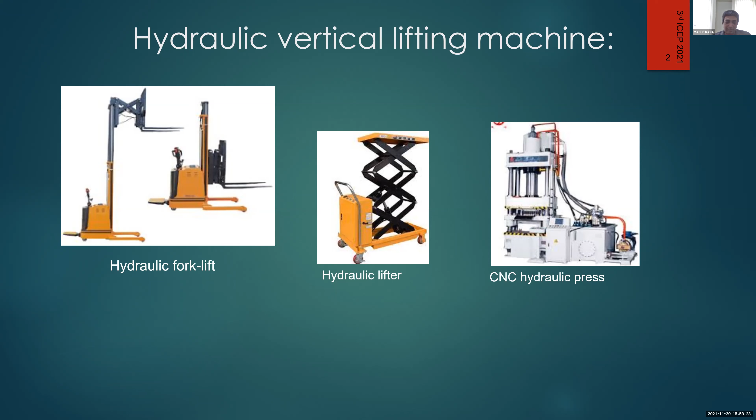My research focuses mainly on vertical and inclined hydraulic cylinder operated machines to lift a heavy load, for example hydraulic forklift, hydraulic lifter, hydraulic CNC hydraulic press, hydraulic lift, etc.

My research background was like, as you might know, when a vertical cylinder is operated against a gravitational force, during this lifting it requires energy supply to overcome the lifting force. However, we can use this potential energy to lower the load by controlling the flow of the fluid.

But it requires flow control and directional control valve. Downstream fluid velocity depends on the load of the system. To calculate the energy, flow control valve and directional control valve are throttle valves that have a significant loss of energy. The greatest problem is that by operating this throttle valve and hand lever valve, it is not possible to control the accurate positioning of the cylinder at a required position, which is very essential for computer numerical control machineries.

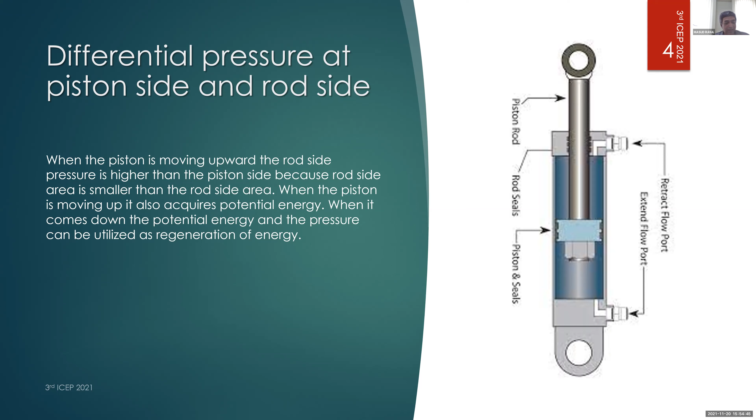Other than potential energy, there is another energy known as pressure energy, as the rod side pressure is more than the piston side pressure. To recover both of these energies, a closed loop servo hydraulic valve and a bypass valve are introduced in this system. My objective is to improve energy efficiency of a vertical hydraulic cylinder servo hydraulic system and investigate the energy efficiency at different load conditions.

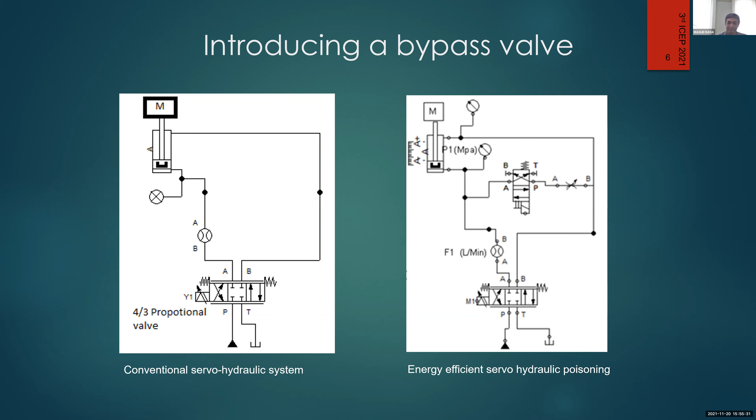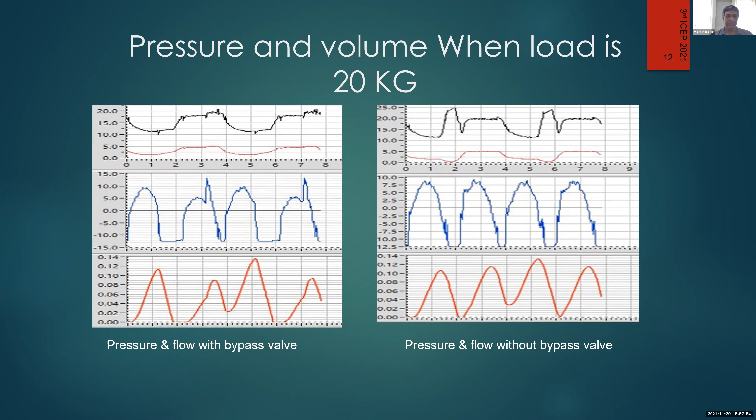In this slide, you can see the experimental results for 10 kg and 20 kg load with varying pressure. For example, at 20 bar pressure and 10 kg load, efficiency is more than 6%, and at 60 bar pressure and 10 kg load, the efficiency is 3.79%. And with 20 kg load, at pressure 45 bar, the efficiency is 17.25%, and at 60 bar it's 10.78%. That means as the pressure gradually increases, the efficiency decreases.

But at the same time, when you increase the load on the system, the efficiency also increases, but it's still gradually decreasing as pressure increases.

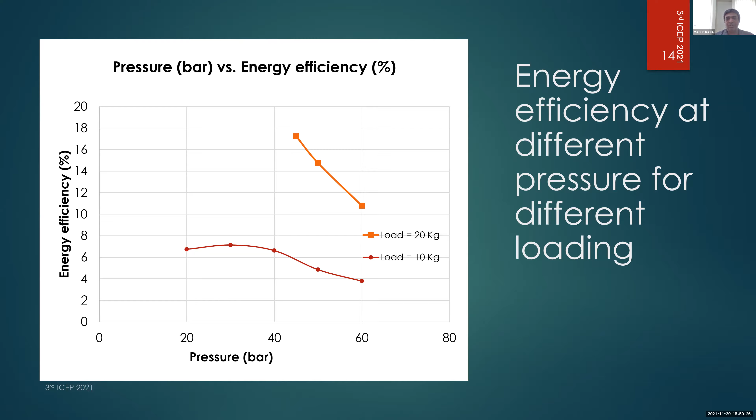So in conclusion, I can say a vertical cylinder servo hydraulic system with a bypass valve, which only opens while the cylinder is moving downside, gives higher energy efficiency than without the bypass valve.

The energy efficiency is higher at low pressure, and it gradually decreases when the operating pressure increases. When the cylinder load is doubled, the efficiency also increases. Maximum energy efficiency can be achieved by keeping the pressure as low as possible to maintain the required velocity, and by putting the maximum load on it.

So thank you very much for your kind attention.

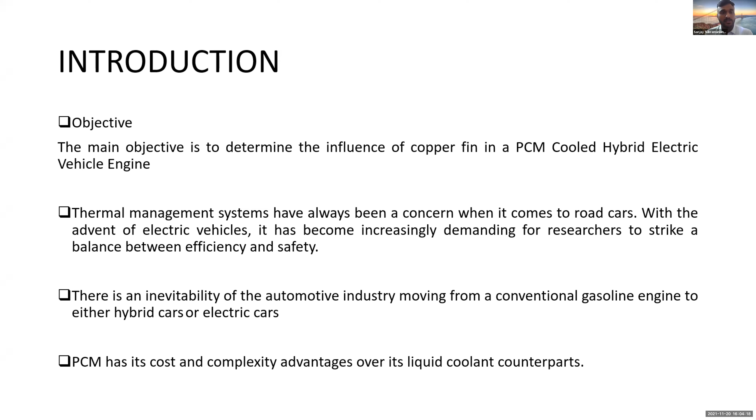So moving on, what is the methodology that we have used here? We have gone for two geometrical models: one model with no fin, and the other model with 8 fins.

Regarding the mesh, we again have the no-fin model and the fin model. We have used quadrilateral meshing for both cases, and the orthogonal quality was very much in the acceptable range, around 0.98, with skewness less than 0.3 for both cases. So we should be expecting very accurate results.

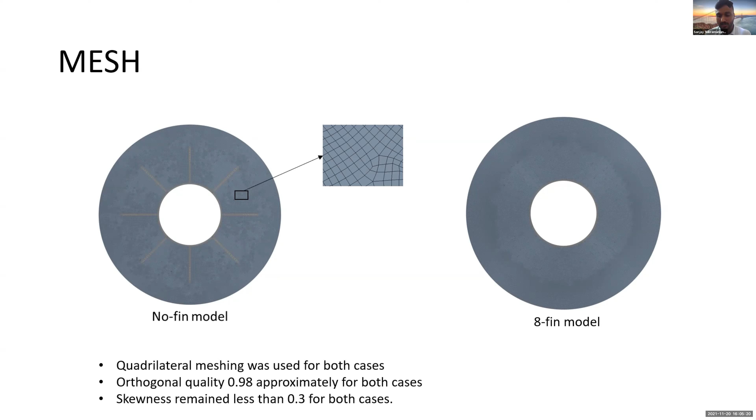Next, the boundary conditions. The flow condition—since there is not much flow here—it's only flow due to natural convection and buoyancy effects. So we have used laminar flow condition, and kept the solidification melting condition along with energy. For the analysis type, we have gone for a transient analysis because it will give us more idea of what is exactly going on with respect to time rather than a steady state.

The solid that we have gone for is copper. The reason is that previous analyses used aluminum fins, but we have used copper because it has a higher thermal conductivity. So once you wrap the copper around the battery, it can pump the heat away from the battery much more quickly, and that is why we have gone for copper.

And the phase change material that we have used is a commercially available phase change material, which is Rubitherm 58. The reason for choosing Rubitherm 58 is there are a variety of advantages we found for it.

The solidus and liquidus temperatures have a difference of about 14 Kelvin, which means we will see a little bit of a slant in the curve during the latent phases, not a straight curve.

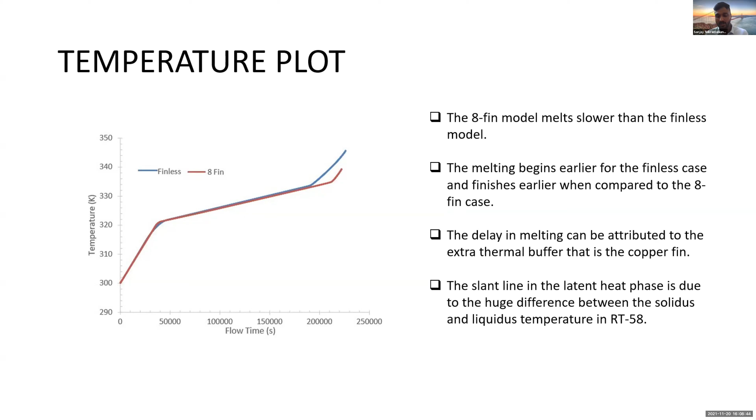Moving on to the plot. The melting phase begins at about 35,000 seconds for the 8-fin case, which starts later than the finless case at about 25,000 seconds. The delay in melting is due to the copper fins, which pump the heat away from the battery, acting as an extra thermal buffer before moving on to the PCM. That accounts for the extra 10,000 seconds, caused by the copper fin.

We can also clearly see that the slopes of both the finless case and the 8-fin case are almost parallel, meaning the rate of melting is quite similar. It is slightly steeper for the finless case, but for the 8-fin case it's not that steep, though almost similar overall.

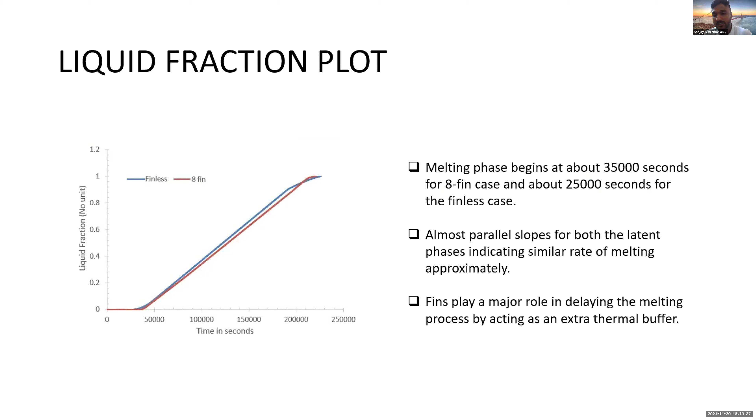Fins play a major role in delaying the melting process by acting as an extra thermal buffer, as we have already discussed. The major findings from this research regarding the influence of the fin: first, the copper fins help remove heat from the battery at a much faster pace than the copper ring without any fin.

The 8-fin case provides a more uniform temperature distribution. The maximum temperature was 62 degrees, the minimum was around 58, and the average was about 60 degrees Celsius. The average temperature at the time of completion of melting for the no-fin case is 6.75 Kelvin higher than the fin case. That is another conclusion from this research.

For future simulations, work can be based on different cooling methodologies and different types of materials used in those methodologies. We could go for a hybrid cooling approach, like active-passive cooling, rather than purely active or passive, to see if it gives better results and battery operating conditions. The number of fins can also be varied—here we used a finless model and an 8-fin model, but we could try 16-fin or 4-fin models to see how they affect overall working conditions.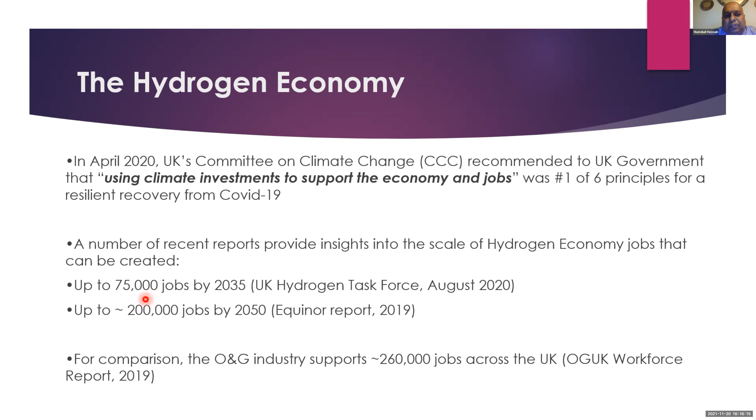Looking at some forecasts, the UK Hydrogen Task Force says there will be 75,000 jobs by 2035 in the UK. Similarly, another prediction is that we'll create 200,000 jobs by 2050 in the hydrogen economy. Comparing that with oil and gas jobs, currently the oil and gas industry supports 260,000 jobs across the UK. So by 2050, if we believe the Equinor report, we may achieve a similar job prospect in the hydrogen economy.

They have come up with a hydrogen plan for how to move to a hydrogen economy. The UK government plan is to use hydrogen by 2030 to heat people's homes, power businesses, cars, cookers, boilers, and more. So basically, we are moving hydrogen into transport, heating, cooking, and things like that. In order to achieve that, we have to develop the technology rapidly.

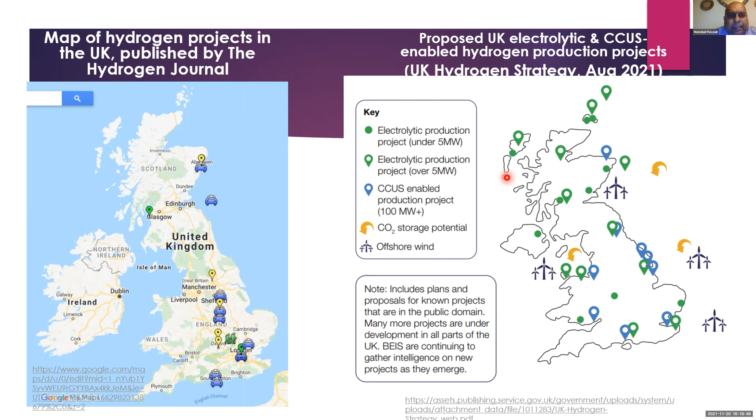In terms of hydrogen transport, looking at hydrogen filling stations, currently in the UK we have only about 11 hydrogen filling stations, and these are kind of demonstration projects. It's not really commercial because we don't have much hydrogen car running around, we have more electric cars than hydrogen cars. But out of those 11, 2 hydrogen pumping stations are actually within Aberdeen city, where our university is massively interested in hydrogen technology and trying to make Aberdeen a hydrogen hub inside the UK.

If you compare these 11 hydrogen pumping stations against currently available petrol stations, there are 8,380 operational petrol stations across the UK. So you can see the massive difference in the availability of hydrogen across the country.

Moving on to the next one. As I said, hydrogen economy has been considered in Aberdeen city because, as I said before, it is known as an oil and gas city, but they are trying to move on from oil and gas to hydrogen. A massive hydrogen project is going on around Aberdeen city. I'm going to talk a little bit about hydrogen hub, Acorn hydrogen, and the energy transition zone that is across Aberdeen.

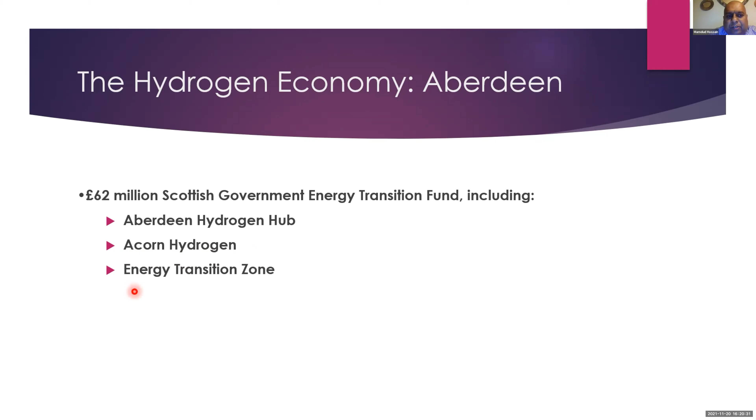St. Fergus is a very good location where you have existing infrastructure of oil and gas pipeline. Oil and gas is coming to St. Fergus. With steam reformation to hydrogen production, carbon dioxide will be released and captured there. Then through this existing pipeline, we can blend hydrogen into the existing pipeline and transport it all over the UK. The pipeline infrastructure is there, the gas terminal infrastructure is there, so there is a future in producing hydrogen. This project will start very soon, within 3 years.

Another massive project going on in Aberdeen is the hydrogen bus. It started off with 2 hydrogen buses. Now we have 65 hydrogen buses running across Aberdeen. We have 2 hydrogen fueling stations, as I said before.

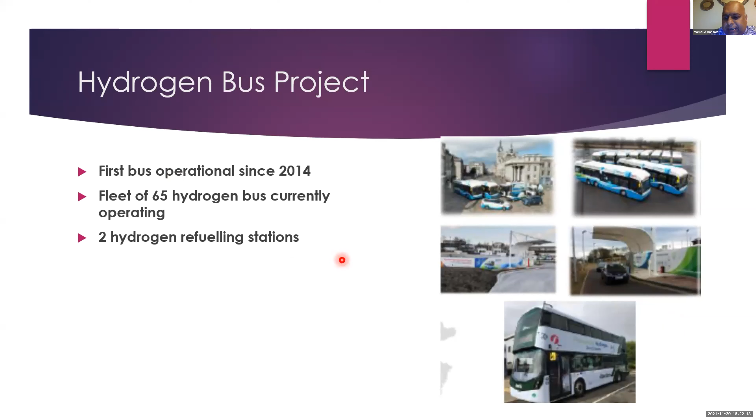Another project is looking at converting offshore wind into hydrogen. Recently, this company Dolphyn took on this project with a 3.12 million pound investment. They are putting in a 10 megawatt demonstration unit. You have offshore wind connected to a desalination plant and electrolyzer that will produce green hydrogen, and then it will be transported through the offshore pipeline into the land.

So what is the method of producing green hydrogen? The main method is electrolysis. Currently, most hydrogen in the UK is produced from steam reformation of natural gas. However, if you look at the capacity of electrolysis, you can see it's rapidly increasing. In future, hydrogen will be produced from a green source, meaning splitting water using a renewable energy source in an electrolyzer.

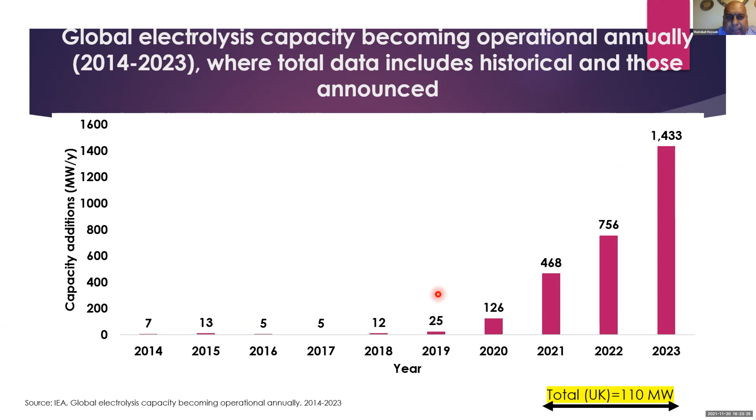Let's look at how the electrolyzer works. The electrolyzer is made of a polymer electrolyte membrane in the middle, with cathode and anode sections. Within that you have a flow channel. On the anode side, water flows through the flow channel, then diffuses through a porous diffusion layer into the catalyst layer.

In this zone, due to electrochemical reaction, water is split into hydrogen and oxygen. The hydrogen atom flows through the polymer electrolyte membrane into the cathode section. We need to put electricity in to transfer a free electron from the anode side to the cathode side, and on the cathode side, the electron and proton, that is hydrogen, combine and create hydrogen gas. On the anode side, we have water, and oxygen is generated. You have to remove the oxygen through the water.

If you design that properly, you can convert more than 70 or 80% of water into hydrogen, with the rest remaining as water and oxygen gas inside the anode section. From the fluid dynamics point of view, you need to design this channel appropriately so that you can move water and oxygen quickly out of the channel.

I'm going to show a little bit of research work that we have done at RGU in terms of flow modeling and fuel cell modeling. We started our research on fuel cell, and then slowly moved on to electrolyzer. In a fuel cell, which is the inverse of the electrolyzer, this is the Ballard fuel cell, made of a fuel cell stack. Each stack is made of the anode cathode section, the polymer electrolyte membrane fuel cell, and the gas diffusion layer.

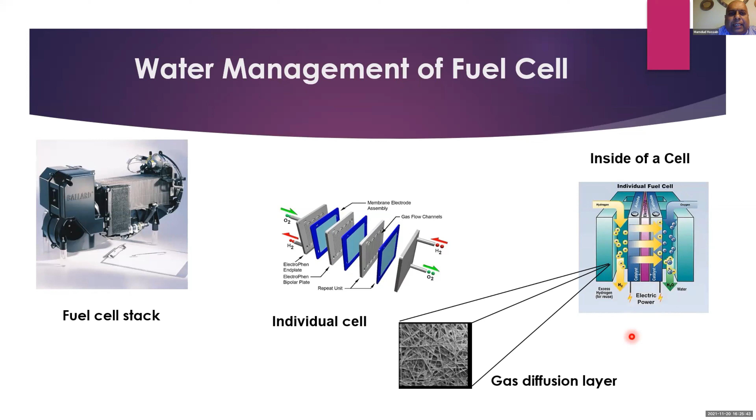If you look at what happens inside the flow channel, it's very similar to the electrolyzer I explained earlier. One challenge of the fuel cell is that when the electrochemical reaction happens, a lot of water is generated inside the fuel cell, and that blocks the channel. Water generated in the gas diffusion layer blocks the channel flow, and the electrochemical reaction basically stops if you cannot move the water quickly. So we have done numerical simulation to look at how water is generated inside the fuel cell and how we can move this generated water quickly. We are looking at water dynamics.

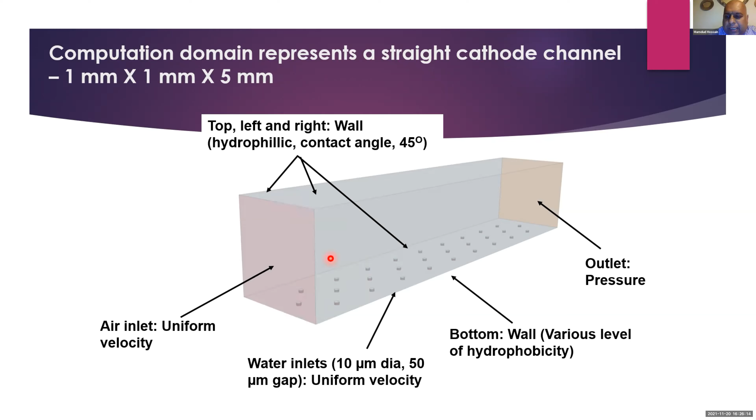So we are basically looking at a flow channel. Within the flow channel, a lot of water is generated, and you can see individual droplets coming out from the gas diffusion layer. They interact with each other, creating a big slug body, and this basically blocks the flow channel to new reactant coming in.

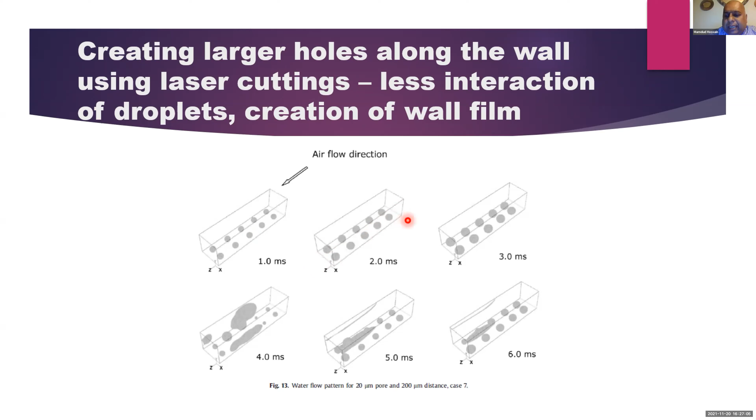So what we can do is move this water quickly by rearranging those droplets using laser cutting on the gas diffusion layer. We intentionally cut a bigger hole along the wall through which we allow water to come out, and we make this wall hydrophilic. As soon as the water touches the wall, it spreads as a thin film, and that way we can keep the gas diffusion layer and the channel clear of water.

By coming up with this innovative design, we managed to reduce the surface coverage of water by more than 50%. The volume of water reduced a little bit, but it doesn't matter how much volume of water is there - the main thing is that it is not blocking the surface of the gas diffusion layer or creating a film on the channel.

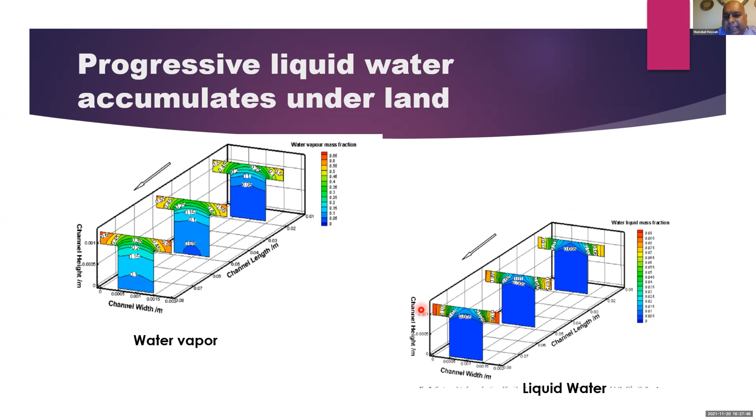Similarly, we have looked at the performance of the fuel cell, and we have seen a lot of water actually accumulates under the land area. So we have to do something to remove water from this land area.

We have also investigated the performance of the fuel cell. If you look at the porosity of the gas diffusion layer, increasing the porosity increases performance at higher current density. We have also looked at permeability of the gas diffusion layer, and if you increase the permeability, performance increases a little bit.

Similarly, we have looked at the ratio of land area versus flow channel area, and we have seen that if you have a smaller land area compared to flow channel area, we can gain some performance. So by managing every little parameter inside the fuel cell, we can increase its performance.

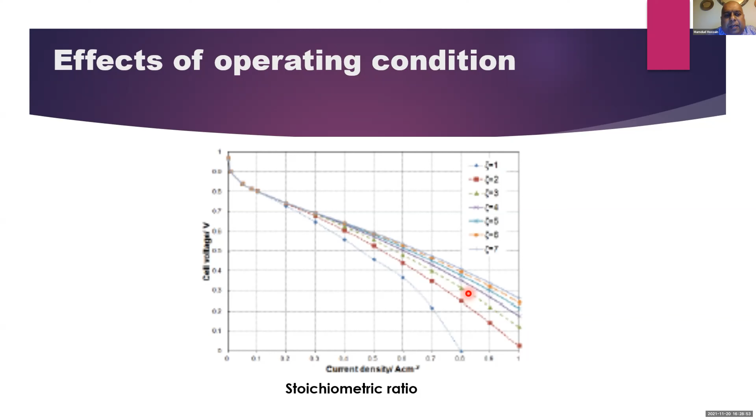Final performance improvement comes from pumping a massive amount of oxygen. If you think of the stoichiometric ratio as 1, pumping 7 times the stoichiometric oxygen can improve performance significantly. Of course, there will be parasitic losses because you now need a bigger compressor to pump oxygen at higher pressure. So those are the fuel cell research areas we have done.

Now we are moving on to electrolysis research, which is the inverse of the fuel cell, and we are trying to generate hydrogen - a massive effort. We have 11 staff now moved on from oil and gas research into hydrogen research exclusively. We are looking at material, flow dynamics, and integration of the electrolyzer with wind turbines.

So we have a big group that just started research on hydrogen production, and we are hoping to publish some results very soon. We are open to collaboration - anybody interested in collaborating with us in this area, we'll be happy to explore different levels of collaboration.